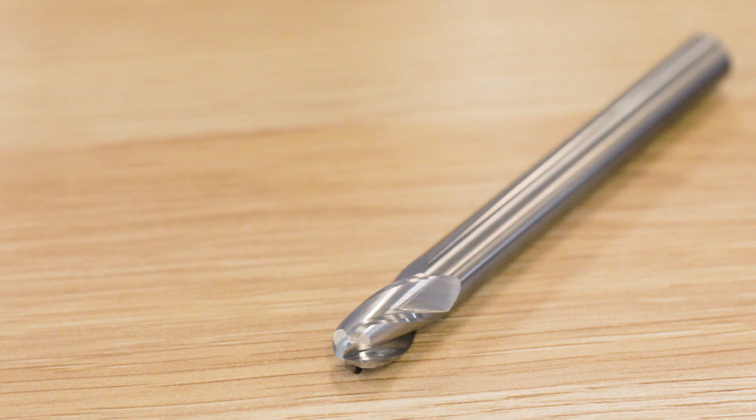On today's episode, we'll be setting up and grinding a ball nose end mill. We'll start with the machine setup, the work holding and the wheel pack, which we've already covered in episodes 1 and 5 of the ANCA Academy, so make sure you go and check that out. Following the machine setup, we'll be designing a tool on the machine using the ball nose wizard in iGrind. Following this, we'll go through the dry run process and finally we'll grind the tool. At the end of today's episode, we're also going to have a discussion with one of our applications experts about some of the common issues and questions people have about ball nose end mill grinding. We've got a fair bit to get through, so let's get into it.

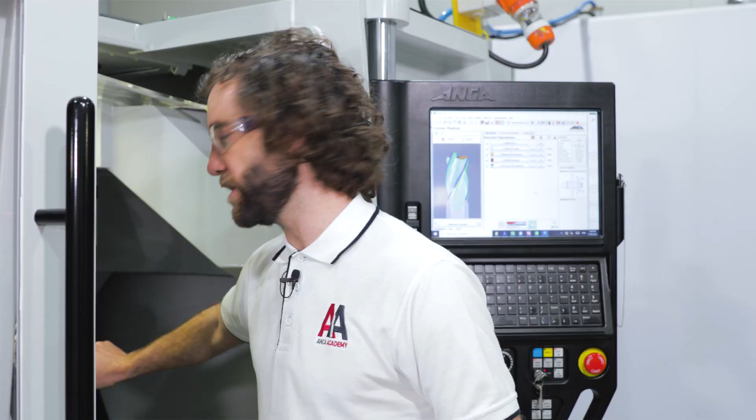The first step in our machine setup is the work holding setup. Today I'm using a W25 Premier Plus PCA collet adapter, and this is a great work holding system for grinding round tools because it gives us plenty of clamp force and also allows us to adjust out any radial or axial run out. I've already set this unit up here today, so I won't be going through that, but if you go check out episode 1 of the ANCA Academy, we cover this in detail from start to finish, so I encourage you to do that.

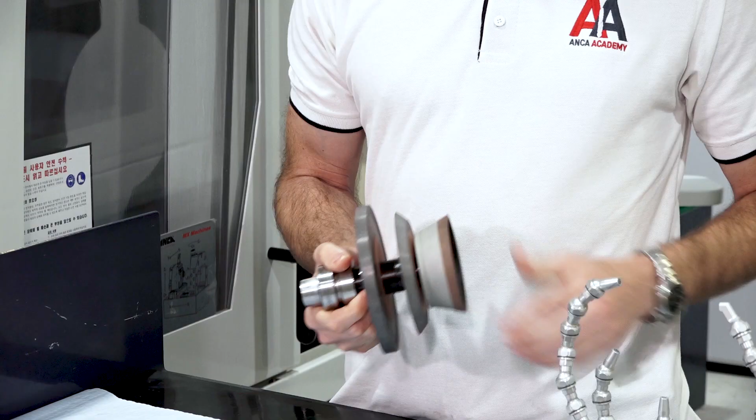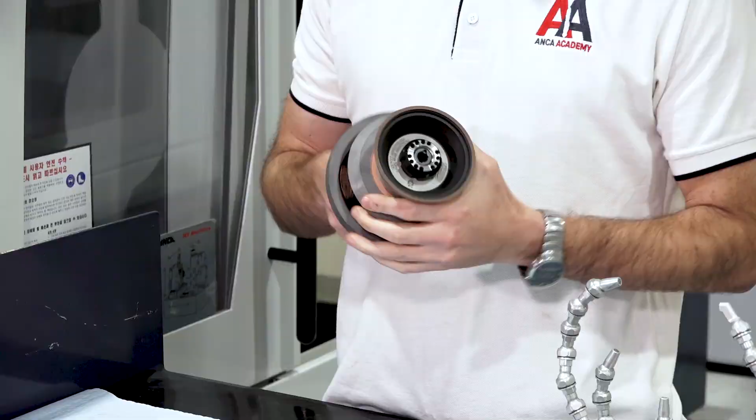Next up, wheel pack setup. I'm holding here a wheel pack very similar to the one we set up in the previous episode. It has the same wheels, the 1A1, the 1V1, and the 11V9 in the same configuration. This is a very flexible wheel pack that can be used to grind a wide range of tool types. Today we'll be using this 1A1 to do the fluting operation and the plunge heel clearance. We'll be using the 1V1 to grind the gash, and then the cup wheel to do the primary relief on the OD and ball. This is not the only wheel pack you could use to grind this tool. You do have several options when choosing a wheel for a given operation, but this is a very standard configuration, so that's what we'll be using today.

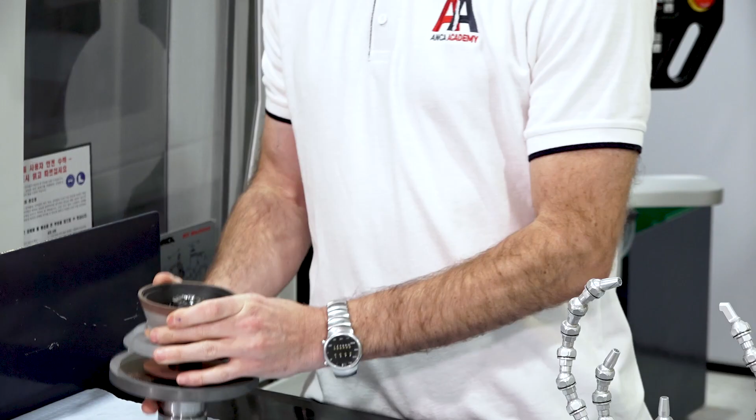I'm going to leave this wheel pack here, and now we'll move over to the machine and get started designing our tool using the wizard.

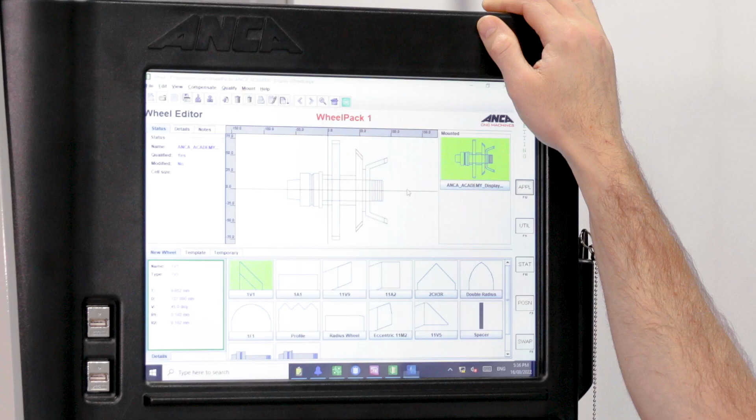Now that we've set up our work holding system and we've mounted and qualified our wheel pack in the wheel editor, it's time to generate our tool file using the wizard. So we'll open iGrind, and here we'll select Create a Tool using the end mill wizard. Today we're going to grind a ball nose end mill with 4 flutes and a 5mm ball radius, so a 10mm diameter, 4 flute ball nose end mill.

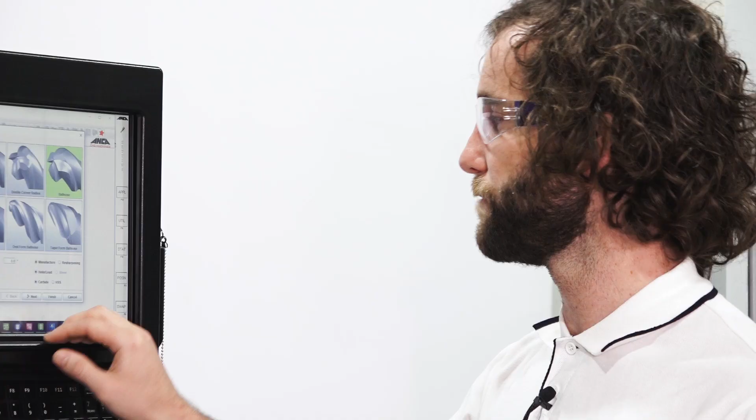These are all selected by default, but you have a few options here: carbide or HSS, what's your material? Today it'll be carbide. Manufacturing from solid or resharpening, we'll be grinding from solid, and helix lead. Next is the end face style, so here we'll be using the default 2 long, 2 short, but there are a few other end face styles to choose from.

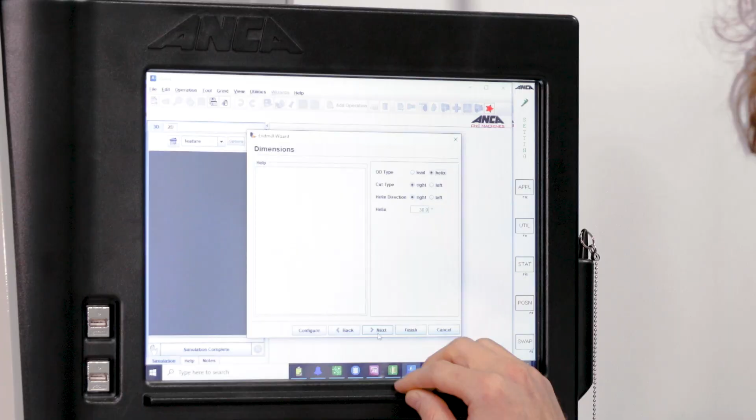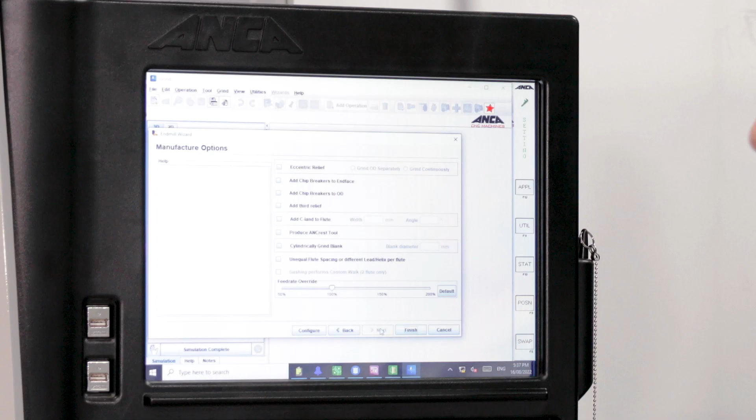As I mentioned, we'll be using the helix OD type rather than lead. Right hand cut, right hand helix, and we'll be using a 30-degree helix angle today. Next window, you have a few other options, including the OD. We can choose an eccentric relief rather than the default facet, but we'll be going with the facet relief today. We can add chip breakers or a C-land, and there are a few other options on this window too, but today we're just going to use the defaults.

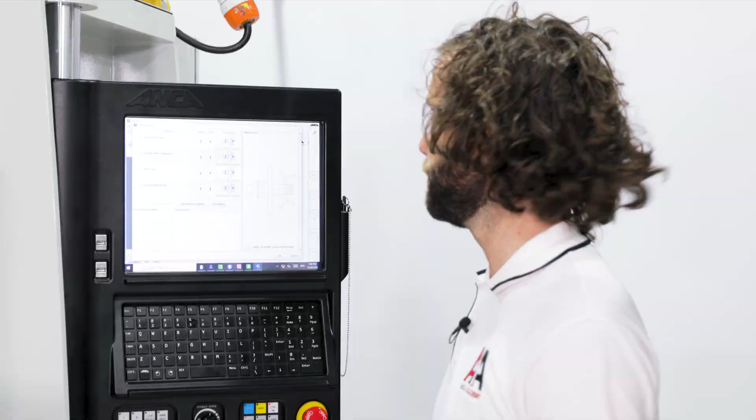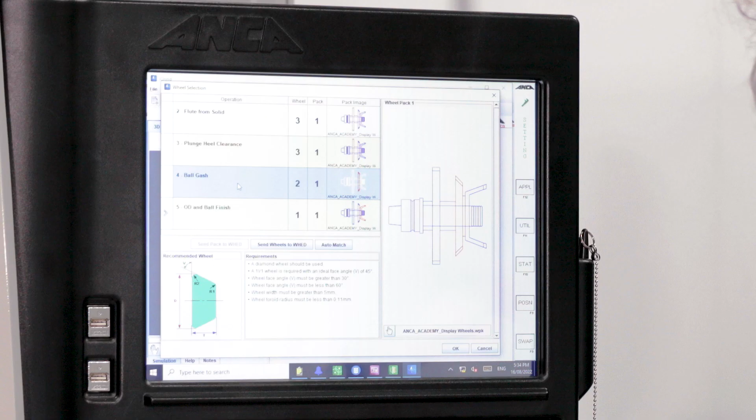So we'll click Finish. Now the wheel selection window is open. iGrind automatically assigns the most suitable wheel for a given operation. You can click the operation and see a few requirements of the wheel to perform that operation. If all of the requirements are met, you'll see the window colored like this. Occasionally you might see one of the operations highlighted in yellow, and what that means is one of these requirements is not met. For instance, the toroid radius here must be less than 0.11. If it's larger than 0.11 and we're using that toroid to grind some part of the geometry, for instance when we're gashing, the bottom blend might be programmed to be a very small radius, but we have a large toroid, then this will show up as yellow here because although we can still grind the gash, we may not get the geometry exactly as we programmed.

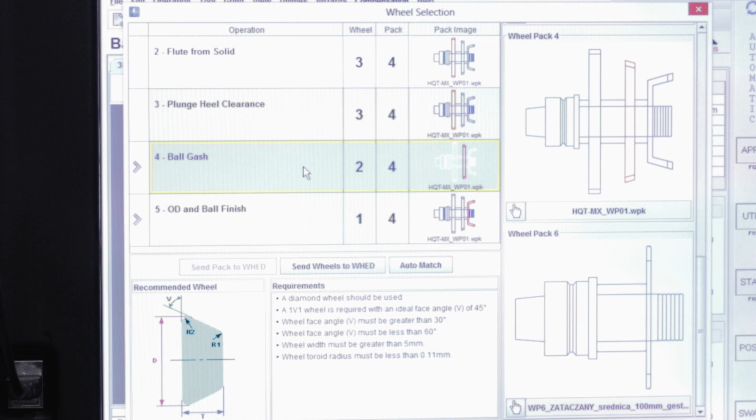The other thing you might see is if it's highlighted in red. That means it's completely invalid and we can't grind that operation with that wheel, so you'll have to go back and choose a different wheel. So let's go OK here.

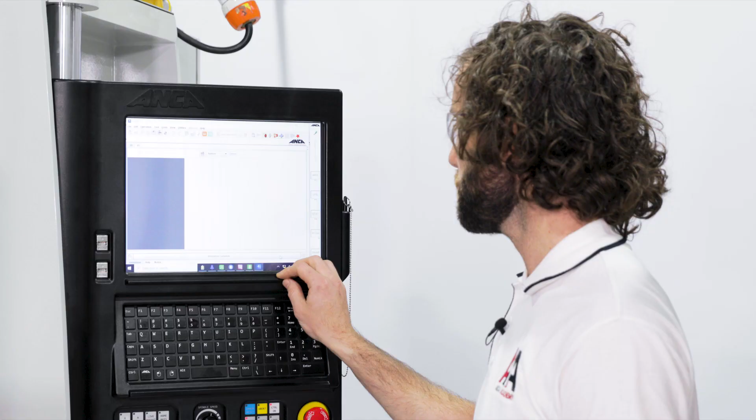And here you see we have our tool file generated. You can see what the tool will look like in the simulation window, and here we also have our operation list. Going through the digitize operation, we have a few parameters here to control how the digitizing is done. I'm not going to go into any details about specific parameters because we'll just use the defaults given to us from the wizard.

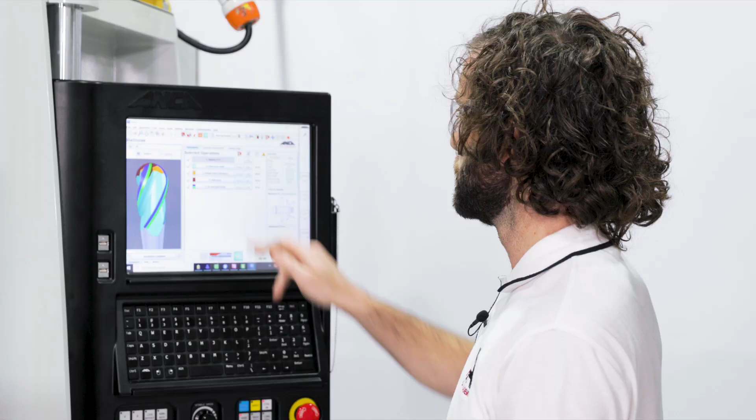Same with fluting, we have a lot of parameters here that we can change, but these have all been created by the wizard, and so on with plunge heel clearance, ball gash, and OD and ball finish. The next thing you'll see on the right is the wheel selection.

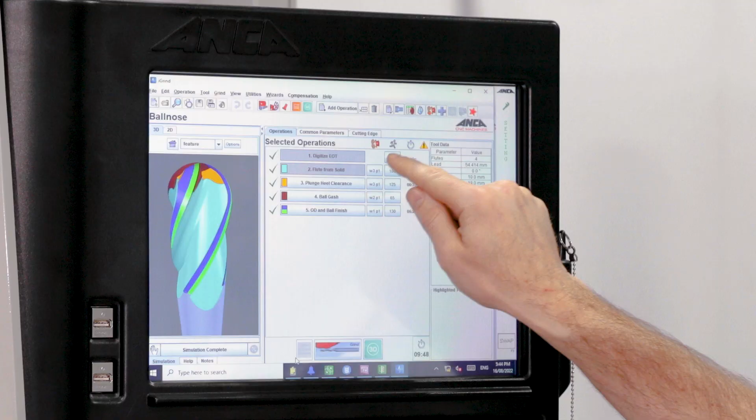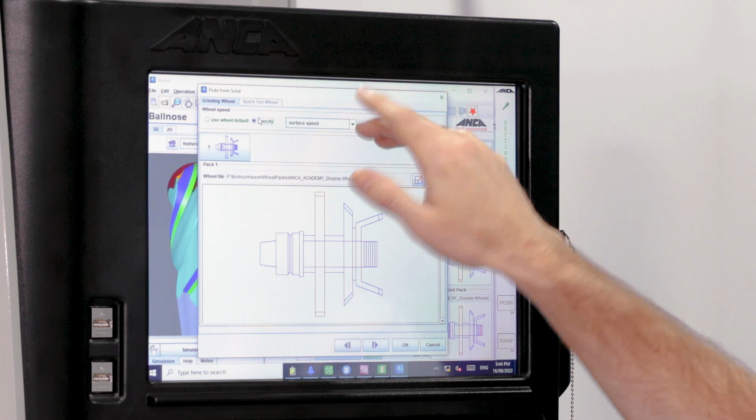Here we can go to a window which allows us to select different wheels if we want to. It also allows us to define the wheel speed. We can use wheel defaults, which takes the speed we defined as default when we qualified the wheel pack, or we can specify a specific speed in either surface speed or RPM for the given wheel. We can do that for all of our operations here.

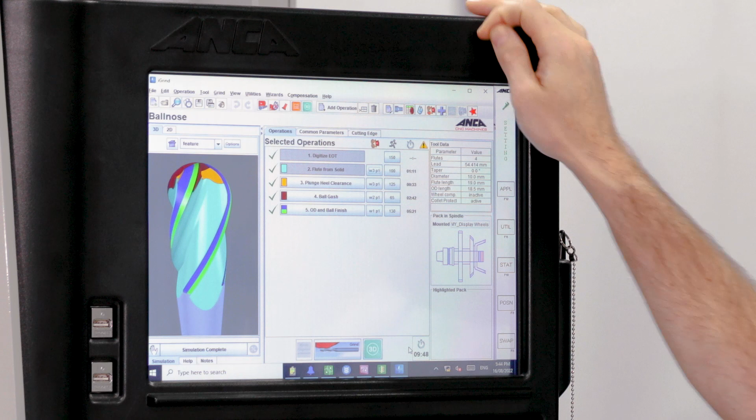Now the final thing to the right of that is the feed rate. We can change the feed rate here, and again, these feed rates are chosen by the wizard based upon what material we decided. Here we're grinding carbide, and these feed rates are suitable for carbide. So that's it, we've created our tool file.

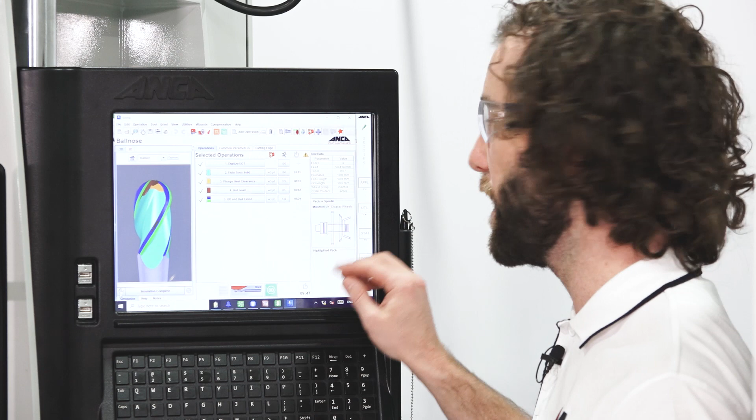Before we move on, I'd like to talk about ANCA's simulation software package, Sim3D. Today we designed the tool in iGrind on the machine itself, and we can see this tool in the simulation window. This simulation shows us exactly what the tool will look like, assuming we've qualified all our wheels correctly. This simulation window though is only a viewer and doesn't contain any of the functionality that the complete software package does. For that reason, it's more common that tools are designed offline using the simulator and then brought to the machine when it's time to grind.

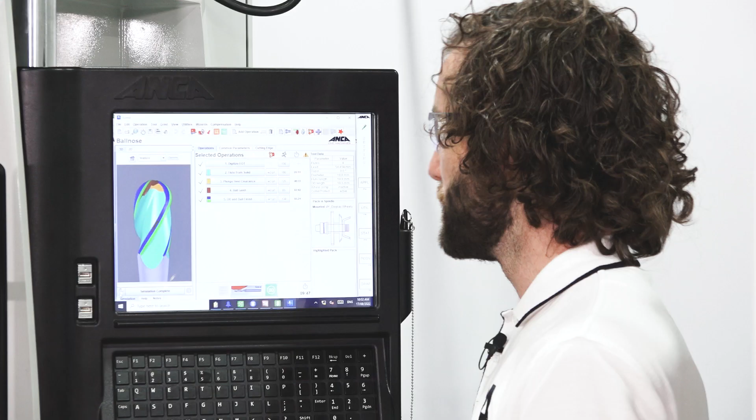The simulator has many features which are useful for tool grinding, including clearance checking. We can run through the entire grinding cycle to see if anything is hitting or if there are going to be any crashes in the machine. We can measure different geometry on the tool, for instance the hook angle or the land width, just to make sure the tool is exactly what we want.

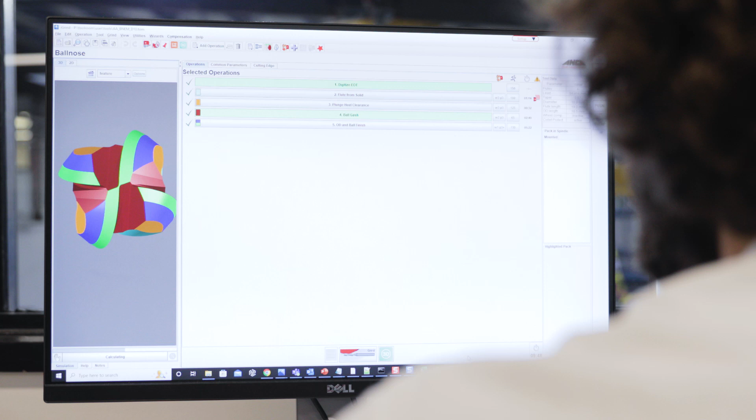We can also modify and adjust parameters and instantly see the effect on the geometry, which can be really useful. Finally, another really useful part of the Sim3D software is that we can see the grind point for every wheel, for every operation, which will help us when we're setting our coolant pipes, which is the next step. So let's go and do that now.

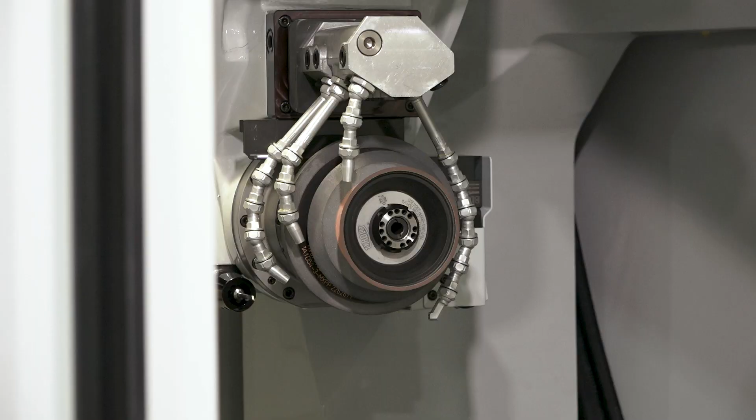Now, coolant delivery is very important and can influence the efficiency of your grinding, how fast you can grind, what cycle time you'll achieve, the tool quality, and the rate of wheel wear you're likely to see. So it's very important that we get this right. The most important aspect of setting up your coolant pipes is making sure the nozzles are accurately directed at the grind point, and this is where the simulator comes in handy.

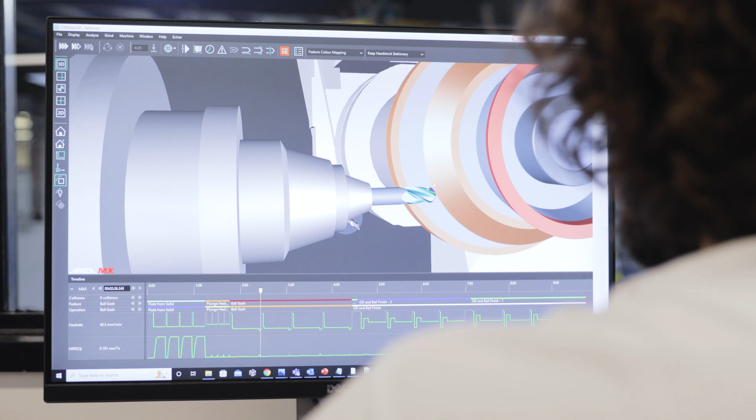I ran this tool through the simulator and observed the grind point of each wheel for each operation, and I've set up the coolant pipes accordingly. For this tool, we're using the 1A1 to do the fluting operation, and here we have a fixed point at about 6:30 on the back toroid of the 1A1 wheel, and that's what this nozzle is aiming at. Then we have the plunge heel clearance operation, which is at about 7:30 on the 1A1 wheel, and that's what this nozzle is aiming at.

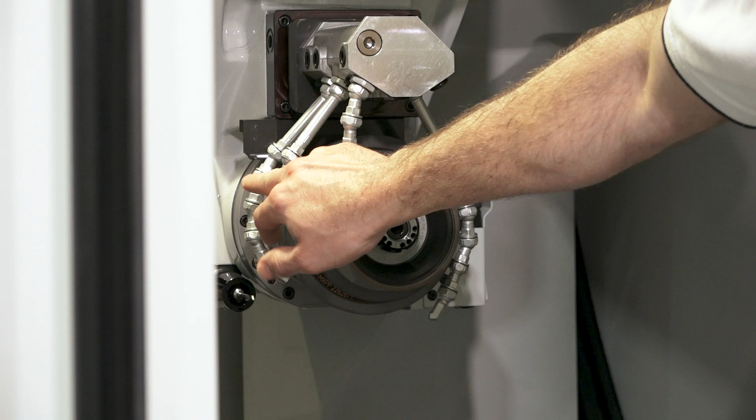After the plunge heel clearance, we have the gashing operation, and that starts at about 6:30 and rolls up to about 7:30 on this 1V1 wheel on the back toroid, so that's what this nozzle is aiming at. Then finally we have the OD ball operation, which starts at about 9 o'clock on the wheel and rolls around to about 10:30, so that's what this nozzle is aiming at there.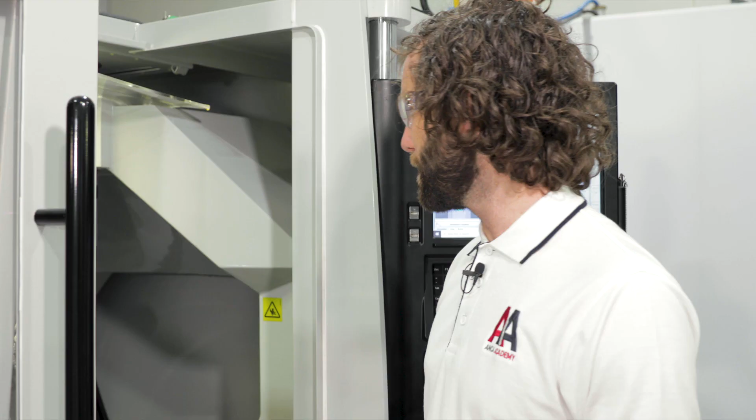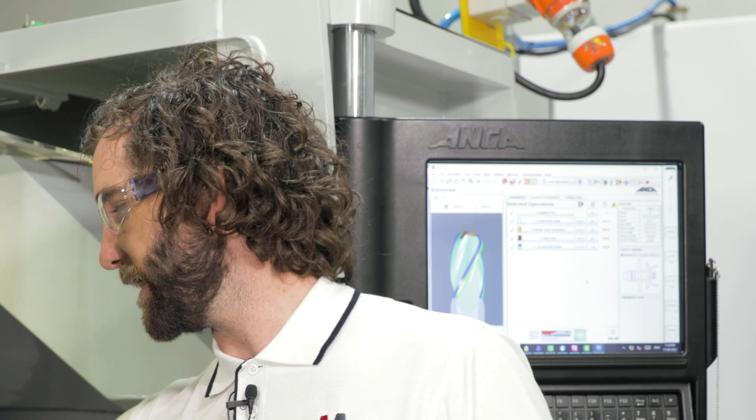Now, it might not always be possible to direct your nozzle exactly at the grind point, particularly when the grind point is moving around the wheel, such as in this OD ball operation. You have a couple of options: you could set up an additional coolant pipe at more than one place along the path—for instance, another coolant pipe at say 10:30—or we can use the headstock coolant pipe to provide the remaining coolant when the grind point rolls past this nozzle. That will be on throughout the entire tool, just hitting the tool itself throughout the grind. At this stage, we just want to make sure the coolant pipes are all pretty much in the right spot.

They don't need to be exactly correct, because we'll probably tweak this before we do our grind. But for now, they need to be in approximately the right position for the next step in our process, which is the dry run.

Before we do our dry run, there's one more step: qualifying the work holding system. Earlier we already set it up and trued it, but we haven't yet taught the machine where the front face of the collet is. That's what we'll do now. So we'll start by inserting a tool all the way in.

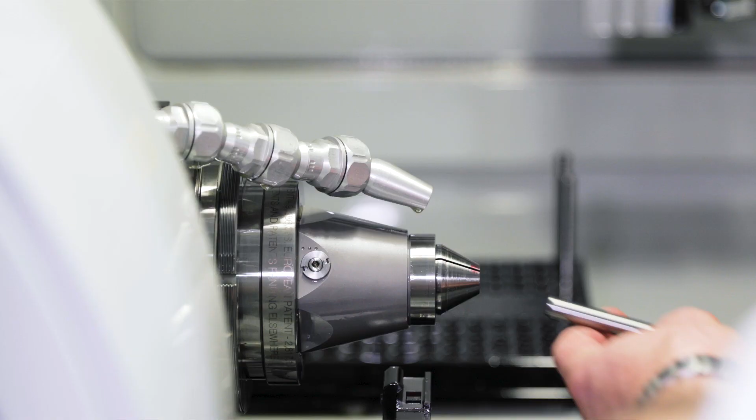We'll close the door and open the application menu, machine configurator. This will display the active work holding system. In this case it's already correct, but we can choose from a large range of other work holding systems if needed.

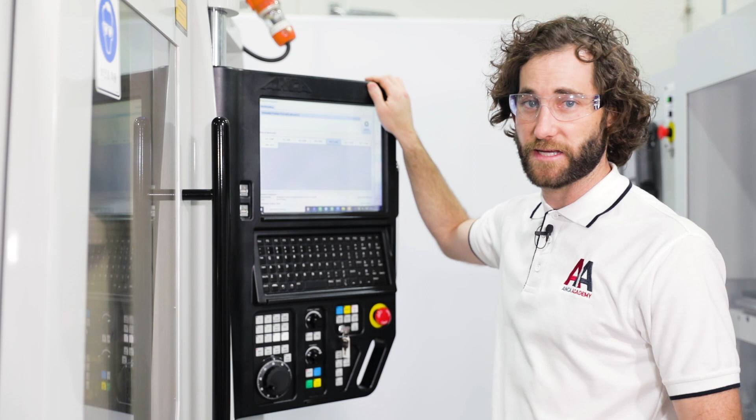The next step is to choose the size. We're grinding a 10mm tool, and we have a 10mm collet in there, so 9 to 12. Then finally we hit digitize and apply.

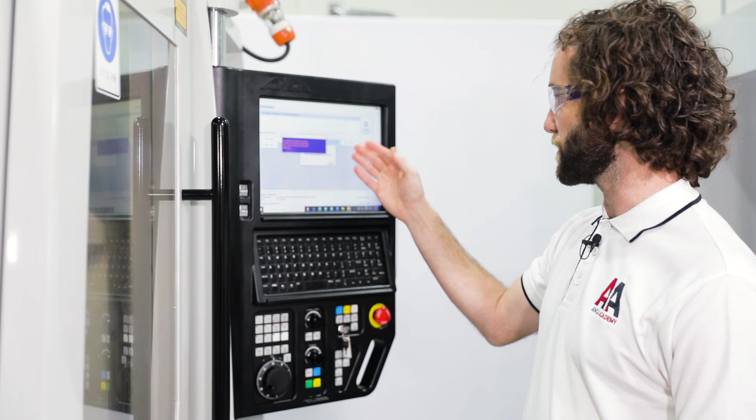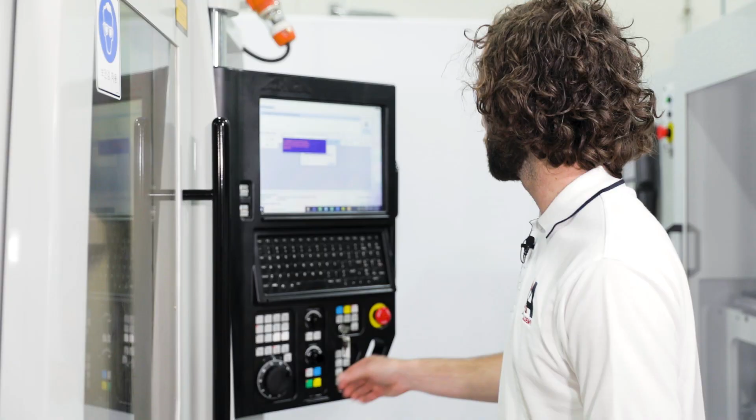Then it's going to ask us to MPG the machine until the probe is close to the collet front face. Here, and press acknowledge. And there we go, the work holding system's qualified.

The next step in the setup is the dry run, a very important final step before we grind a tool for the first time. It gives us confidence that we're not going to crash the machine, that there are no clearance issues at any point in the grinding cycle. Even if we've done a full simulation in the Sim3D software, it's still very important to do this dry run on the machine itself before we grind a tool.

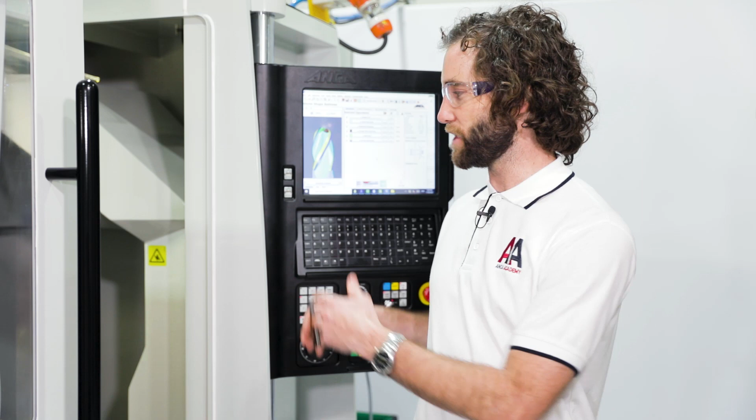That's because Sim3D, while it accurately models the wheel, work holding and tool, doesn't capture certain things, such as the coolant pipes, headstock coolant pipe, or maybe other accessories like a tool support system that wasn't in your simulation. So it's a very good idea to always dry run as your final step before grinding a tool.

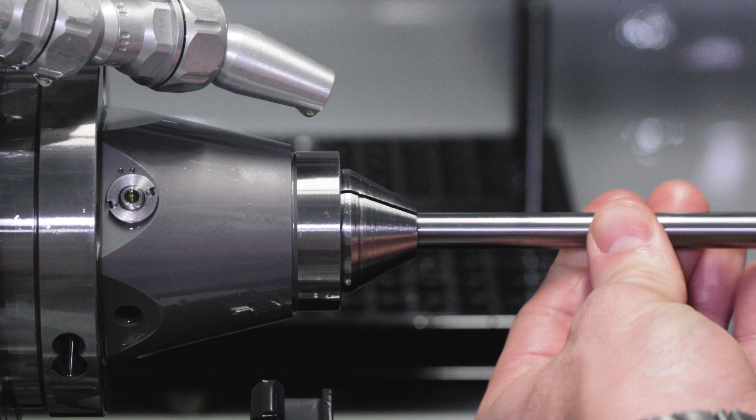We'll go through the dry run step by step. First, insert your tool into the collet, making sure the protrude length matches your tool file, in this case 50mm. Next we'll close the door and press the dry run button up here.

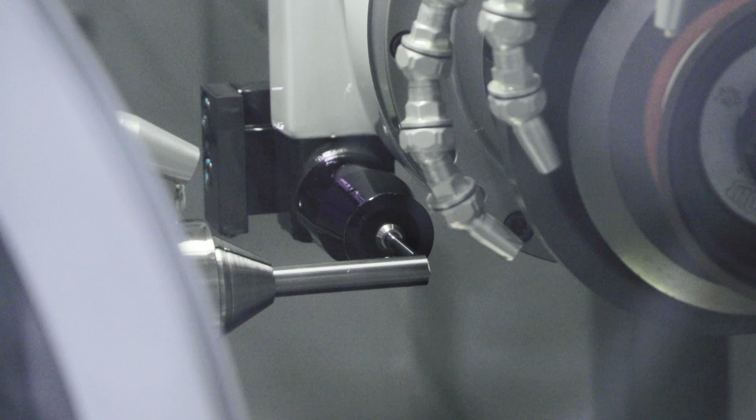We'll press cycle start, and the first thing that happens is it will digitize end of tool. Now it will ask us to unload the dry run tool. Rather than fully unloading it, it's better to just push the tool all the way into the collet.

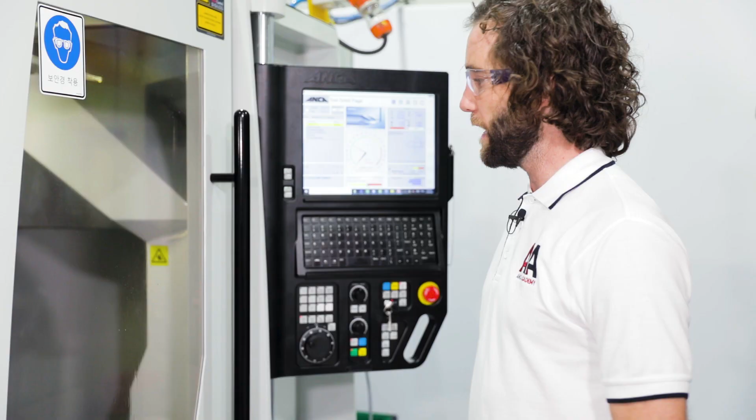Press cycle start, and now it's going to go through every operation exactly as it would if it were grinding the tool. But because the tool has been pushed into the collet, we're not actually going to touch it. So, first operation: flute from solid.

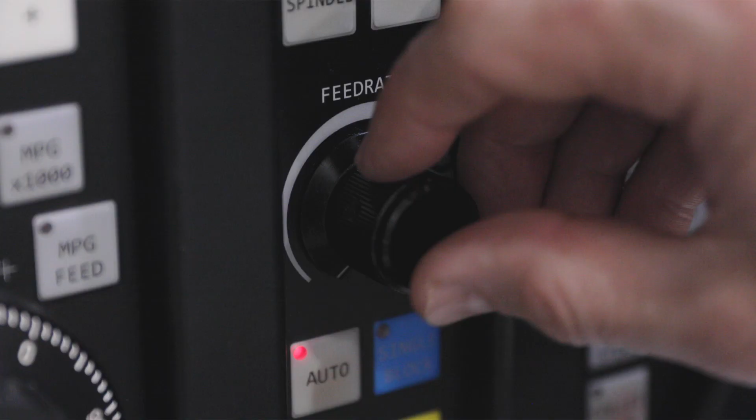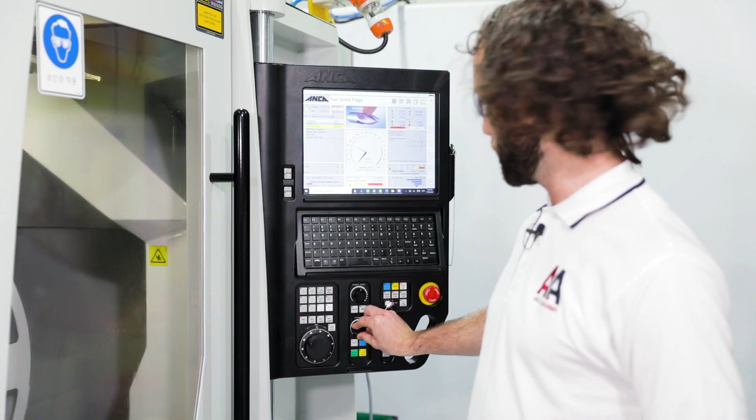We can control the dry run in automatic mode using the feed rate pot, like normal. A good strategy is to use the feed rate pot right up until you have a potential clearance issue, and when things are getting very close, kill the feed rate, open the door, and switch over to MPG mode.

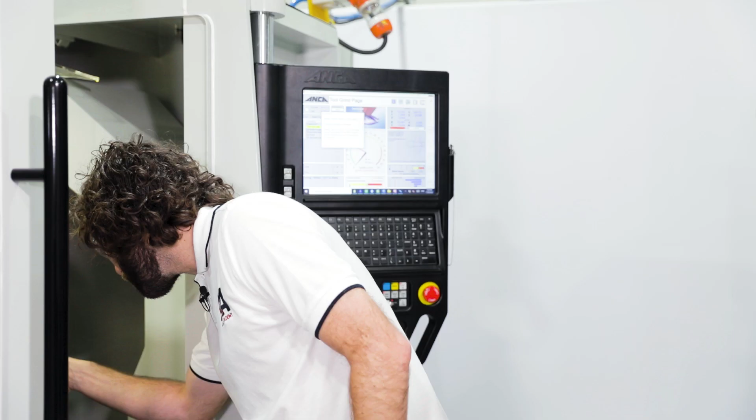Now we can use the MPG wheel to control the grinding move in a much more precise way. If we think we're very close, a telescopic mirror can be really handy, allowing us to see the back side of the wheel. Okay, yeah, plenty of clearance, so we can continue.

Now we're on the retract move, and we've successfully dry run our first flute. We'd continue this way through all the fluting operations, then the gashing, OD ball, and once we're happy there are no clearance issues and we're not going to crash the machine, we can be confident to grind our tool with no problems. That's the dry run process.

So our setup's complete, and we've done our dry run. We're sure we're not going to crash the machine, everything looks good, so it's time to grind a tool. We'll start by inserting the blank into the collet, making sure the protrude length is correct.

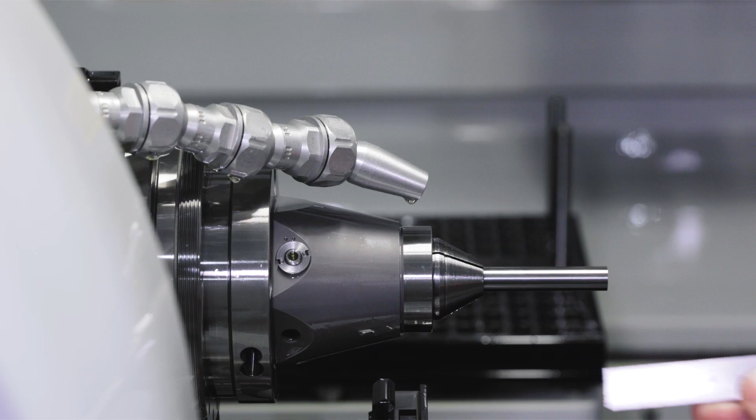Close the door. Now you can see in the operation list, the first thing is the digitize end of tool operation. We can perform that operation at the same time as all the other grinding operations, or do it first, which is what we'll do today. So we'll deselect our grinding operations with only our digitize EOT operation active.

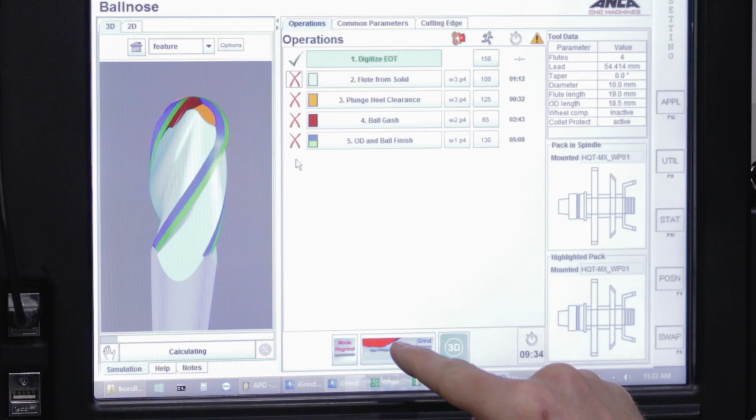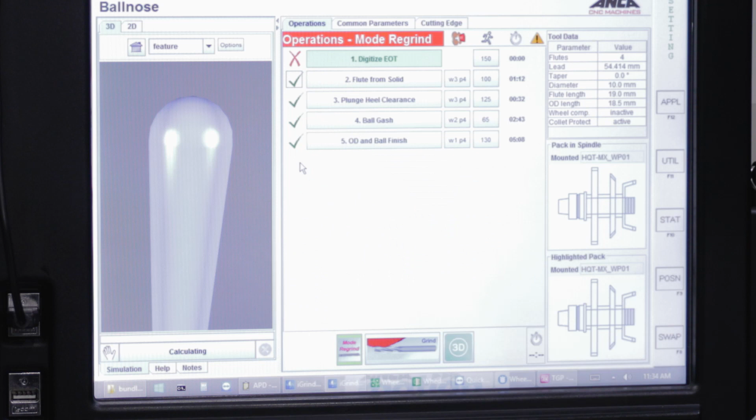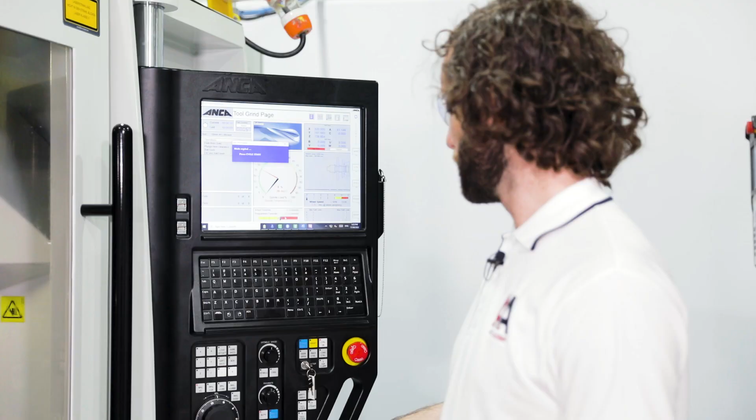Press grind, turn the feed rate up, cycle start. Okay, so the digitize end of tool is complete. Now we can press mode regrind and reselect our grinding operations, and mode regrind will apply the previous digitized values to these grinding operations. So now we'll press grind, cycle start, and we'll come back to a ball nose end mill.